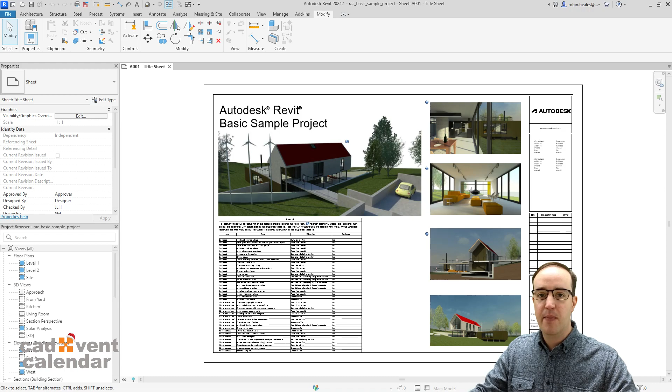There are so many tools inside of Revit that I feel aren't shown or explained or used as much as they could be. In the last video, we showed you how to use the selection box tool to create rapid section boxes, which is so beneficial. And another one that I've used several times with great benefit is the ability to displace components or displace parts of the building for a specific view.

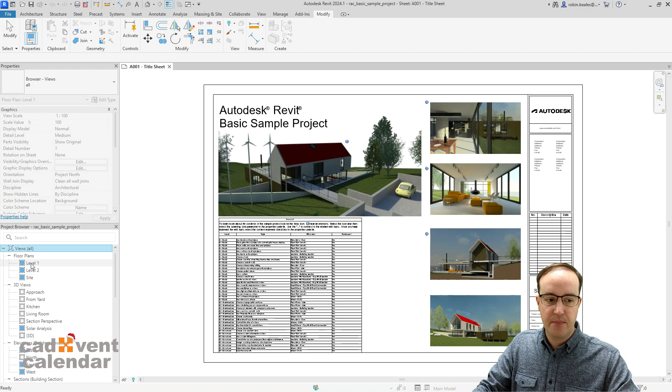This is particularly useful when you're working with modular or other types of buildings where you're wanting to see how something comes together or look at the different elements of a given view. It's really easy to do. We can do it in a 2D view or in a 3D view, and I'm going to show you both examples. If I go onto my level 1 floor plan, I'm just going to create a duplicate of this view. I'm going to rename this view level 1 displaced.

And in that view, I'm going to go ahead and select some components. For example, I could select this entire lower section of the model here and select displace. I can displace this completely out of the way. Just turn off the crop view so we can see that entire model. From there, I can select individual elements if I wanted to. So if I select individual elements such as this column, I can choose to displace this individually and move it out of the way.

This displacement mode is only affecting that view. It doesn't affect the model. It doesn't affect anything else in the file at all. It's purely a view-specific displacement.

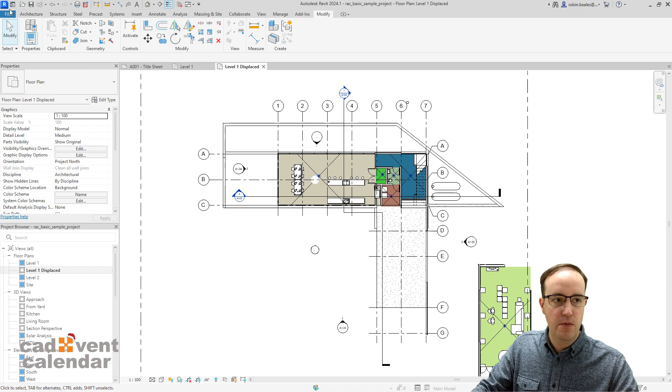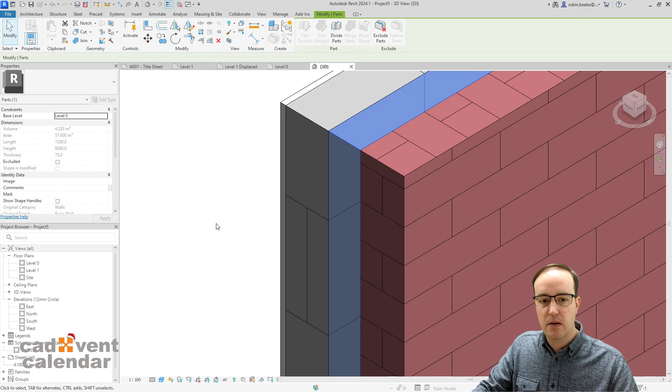If I start a new file here inside of Revit, maybe go to a construction template and place a wall. What I'm going to do with that wall is use a 3D view to create parts. When I create parts inside of my model, it will create individual components for each layer of this wall. So I have my brickwork, cavity, my blockwork, and my plasterboard, all as individual components.

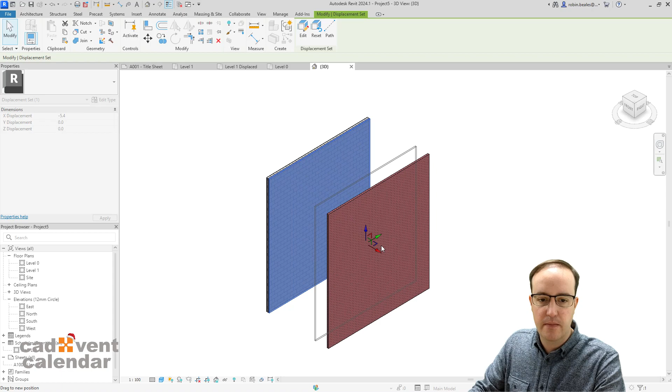If I grab my levels, and maybe I'm going to hide those, I'm going to select the brick, displace, and move it out to the side. Select the cavity, displace, and move it. Select the block, displace, and move it. And we can create quite a nice little build-up view of a component or of a section or of a wall build-up or whatever it might be.

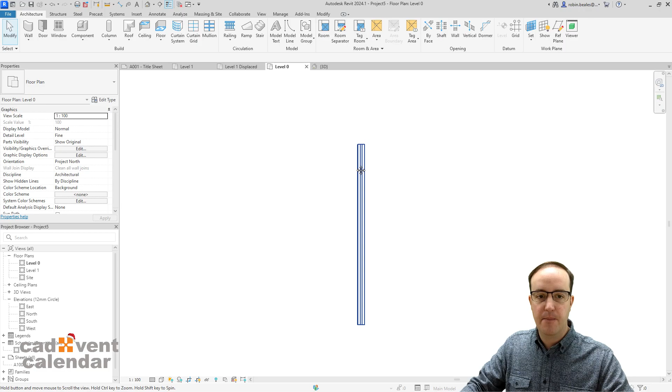You might just want to take the model and explode it into pieces to see the different areas and how it comes back together. But using this displace tool, we can create an individual view-based displaced model which might help you in the different view build-ups for planning, for approval, or for sign-off that you may need. Displacing components in Revit: view specific and very, very beneficial.